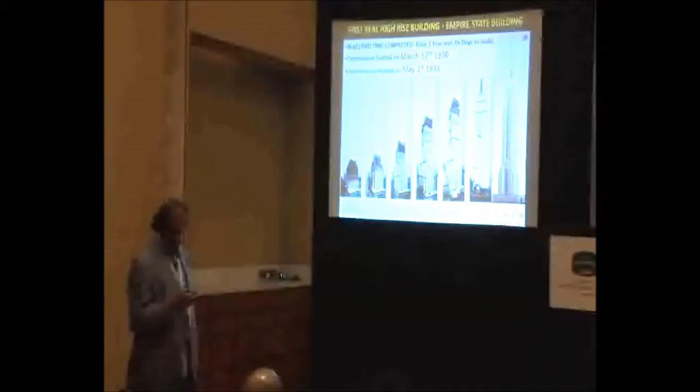It started on March 17th, and by May 1st the building was up, with all the cladding, all the finishing, all the Art Deco interiors done. The building was commissioned by the President from the White House through a remote control. That was the kind of engineering skill and enterprise of that time.

What kind of technology must they have used to make the building so fast, in 13 and a half months? I don't think it required any technology. The only technology I understand that works really well is decision making - there's nothing beyond that. Look at the workforce, the construction.

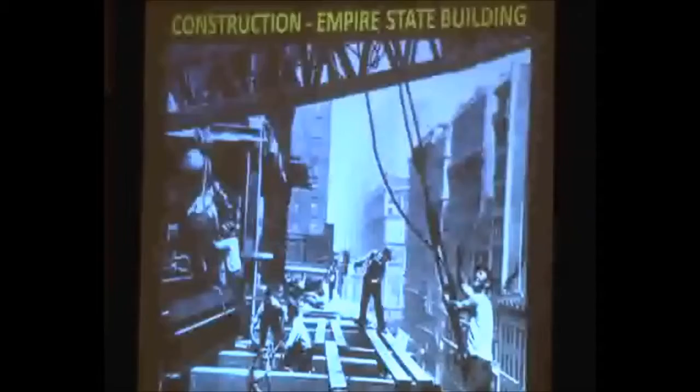These workers didn't even have gloves, helmets, or safety belts. We call them sky boys. They stay in the sky, they rest and work up there, working around the clock purely by the will and desire of the manpower. They were construction workers, immigrants brought from Ontario, not from New York.

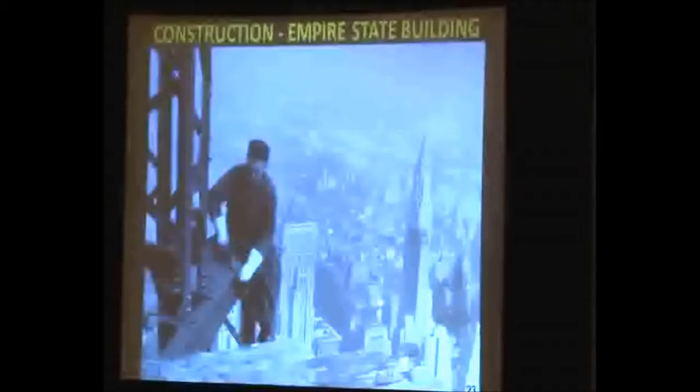This is the 102nd floor, around the 11th month, when they were putting up the spire on top of the building. And they used rivets in those days, not even welding. See the kind of enterprise, the construction technique, cranes, and lifting equipment they must have had - it's simply the will of the manpower.

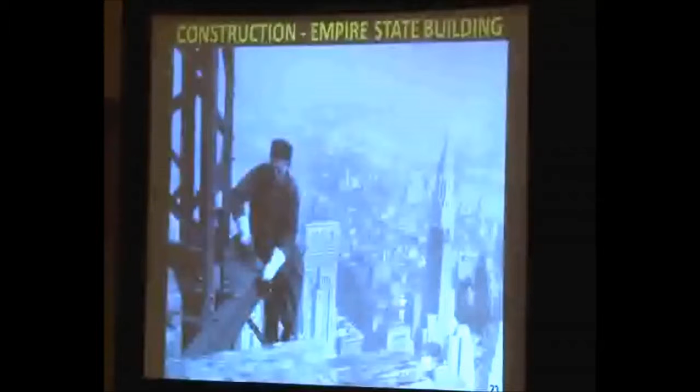This building has been refurbished. It was constructed for about $50 million in 1931, and a refurbishing took around $550 million for this building.

The building was also struck in 1945 by a military plane, by accident. The B-25 plane crashed, and its engine went through the building and fell on the roof of the civilian side, but nothing happened.

The building was designed to take 10 more floors, but they couldn't get permission. The building was so strong, but the only thing is, it was having structural steel of 19 kg per square foot.

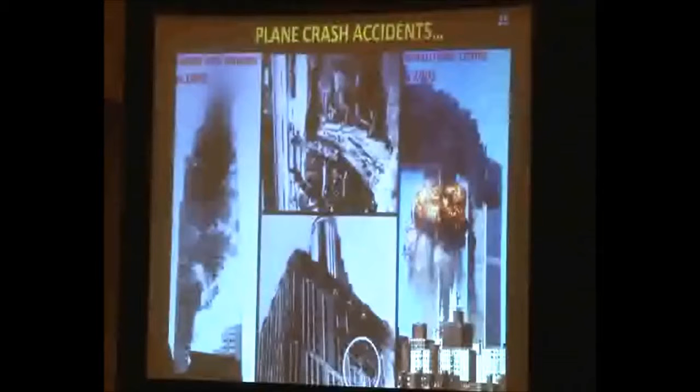The building, as I told you, has been refurbished recently. It spent about $550 million for refurbishing, and spent about $100 million more to retrofit it to make it green. It's the largest building in the world, with 2.5 million square feet area, and got a gold green rating.

It's the largest functioning building in the world with a gold green rating from USGBC, also the US Green Building Council.

The architects and engineers gave a concept at that time called the core and frame structure, which is followed till now in most buildings in the world. They follow this system.

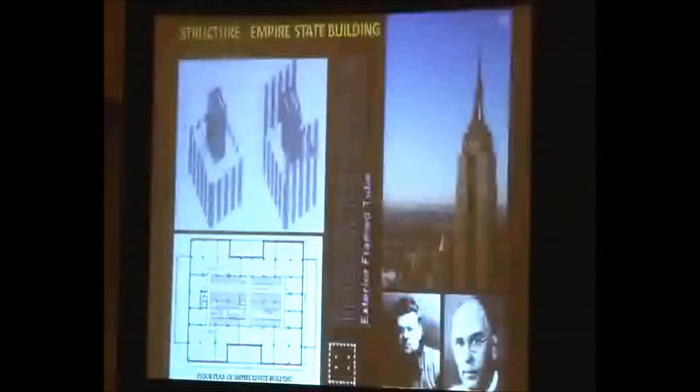Then we had a new structural engineer, Dr. Fazlur Khan. He was a Bangladeshi American resident. He passed through architecture as both architect and engineer. He joined SOM in 1956, and during the 60s he built the most outstanding buildings, 100 to 110 story buildings.

He gave us the concept of structural forms with tubes and frames and so on, which most engineers follow till today. He was known as the Einstein of structural engineers, the greatest structural engineer of the 20th century.

There were a few buildings done by him. We give examples like the Hancock Center, Willis Tower, One Magnificent Mile, and he also devised and gave us, all the engineers, various systems which work and were tried and tested by him.

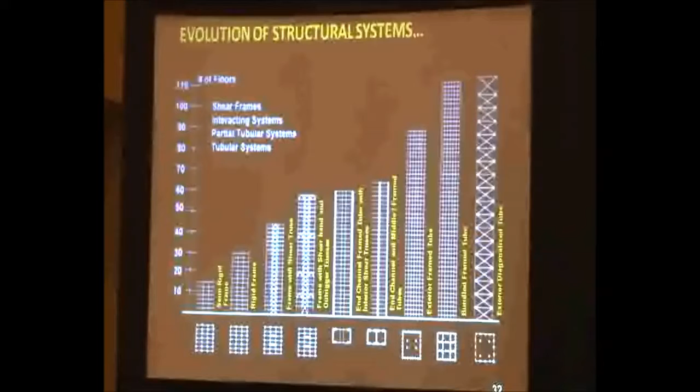We call them rigid frame, tube, diagonal frame, and various kinds of bracings and things like that. The buildings with this kind of building and framing system put together were actually built by him until the 60s.

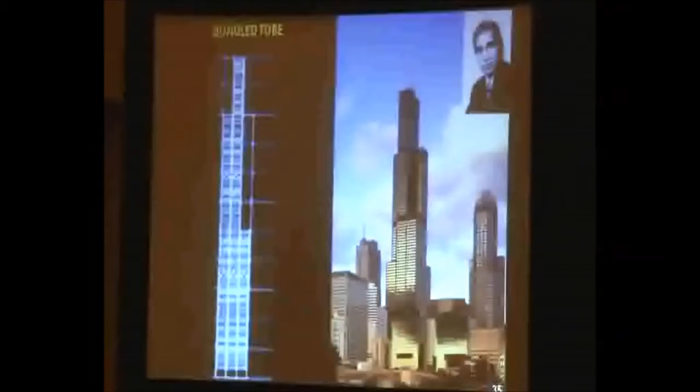Our tube system here, the bundled tube system, is being followed till now in modern times. Burj Khalifa, now the world's tallest tower, and towers in Mumbai behind it use the same concept of bundled tube system for safety, earthquake resistance, and also for wind forces straining over the building.

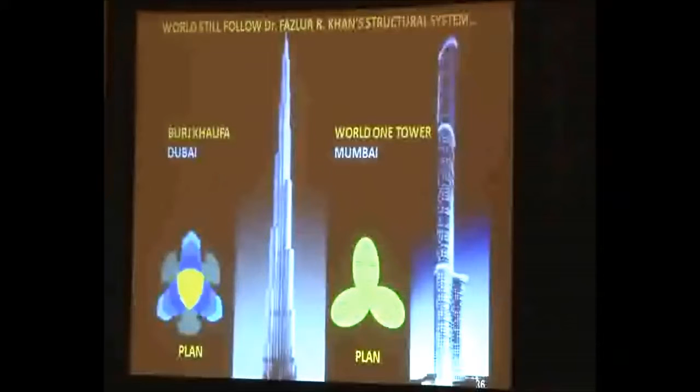And this system works very well. All the buildings all over the world have been following this process.

Do you know that the Burj Khalifa Tower sways by 4 feet due to wind force? The building may move 4 feet, but you won't even notice it, even though 4 feet is quite a large dimension.

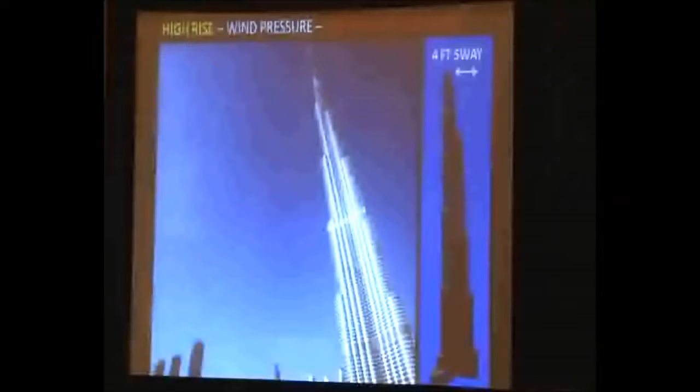It is the architect's design which makes the building safer for earthquake and wind forces. The architect must know engineering, and the engineer must know architecture. A combination of architect and engineer comes out with concepts that make a building more economical, stronger, durable, and resistant to earthquake and wind forces.

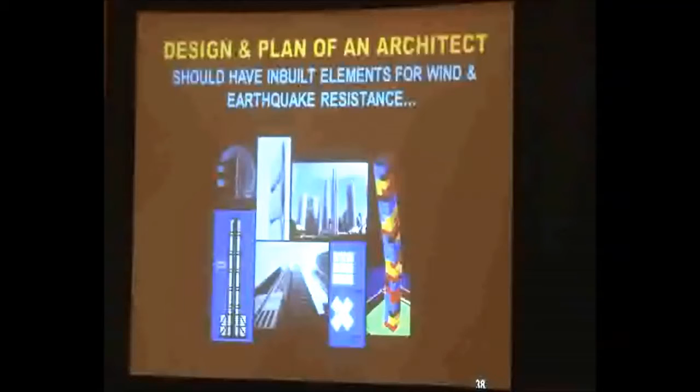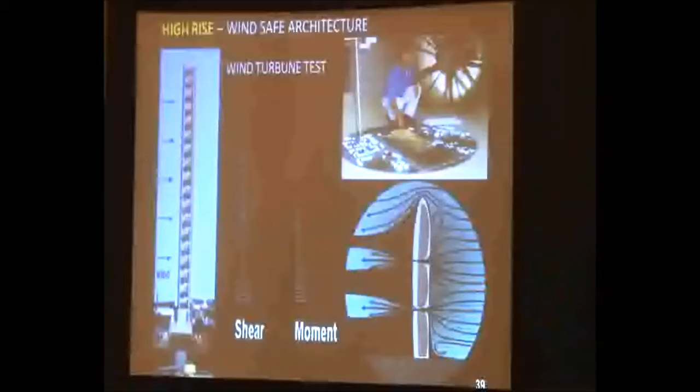Engineers use wind tunnels to make models and check the forces, the shear and moment for the buildings, and architects learn to provide solutions for that.

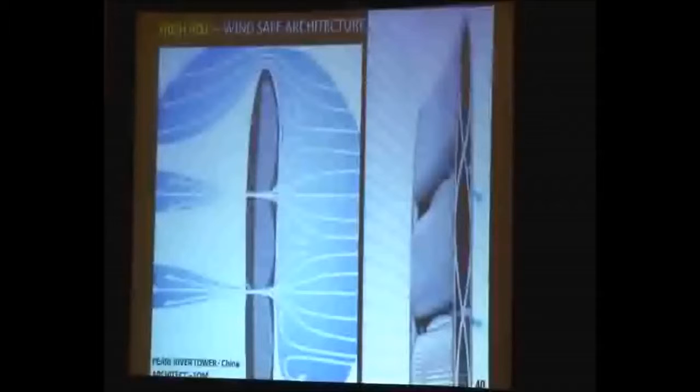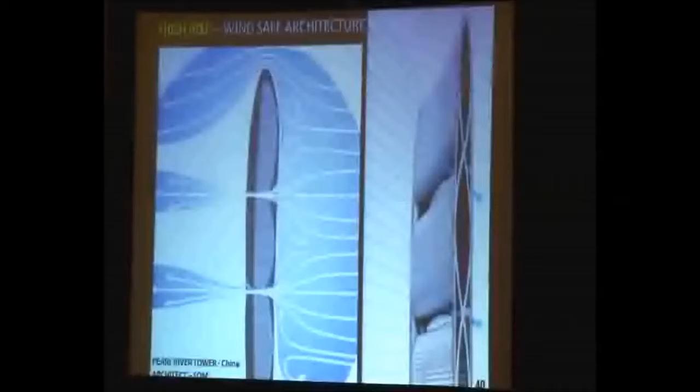In a building done by SOM in China, they gave 4 floors with 2 level cutouts in the building so the wind can flow out and doesn't cause pressure on the building. At the same time, they used that space to put wind turbines to produce power for the building. That's the ingenuity of the architect and engineer put together, making the best out of circumstances. Here's a building done at Pearl River Tower in China.

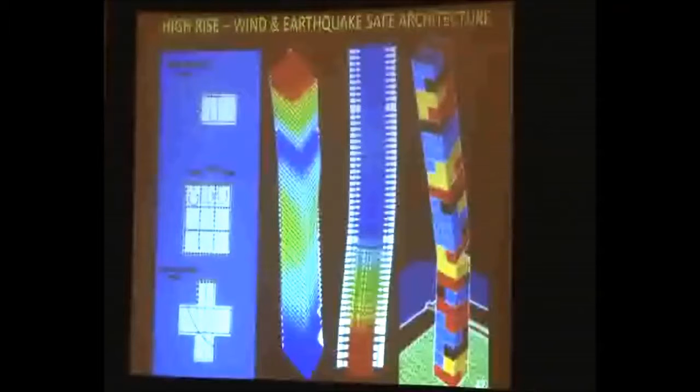In a high-rise building, again, the form can be square, diagonal, or straight depending on the architect. We found that normally a big square mass building looks more stable, but it's not. A diagonal building form actually looks more stable.

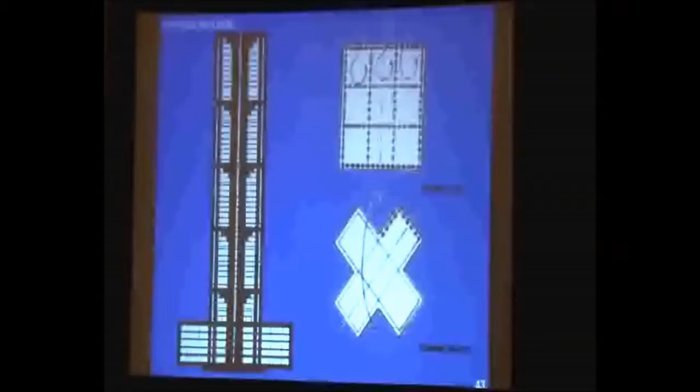It's more stable, lighter, with more mass distributed to take wind pressure and other forces together to make the building more stable. On that principle, you put some bracings or stiffeners in between.

On the same principle, I'm doing a 95-story building in Mumbai, a new corporate building, using composite steel structure—steel and concrete. Steel has a lot of advantages, but its limitations mean it doesn't give me the beautiful architecture or thin slabs required, or ornamentation.

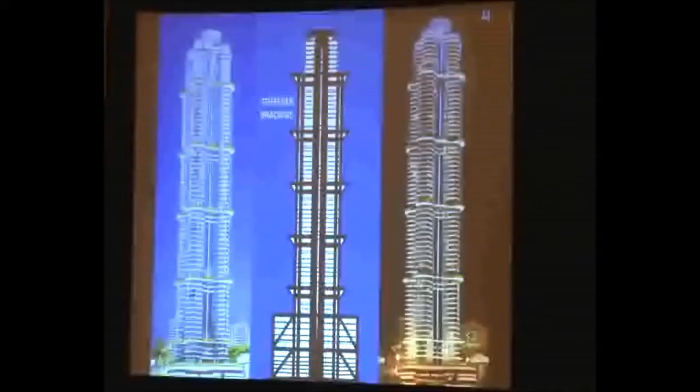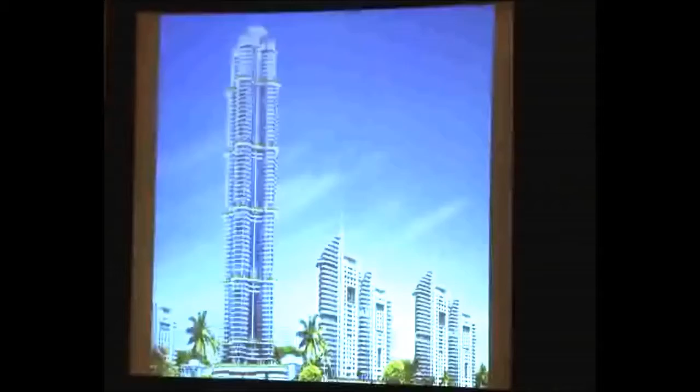So I'm able to combine both of them together, as the skill of an engineer-architect, and we will do it up to a 95 to 100-story building. Beyond that, I have to think differently. These are the building forms coming up now.

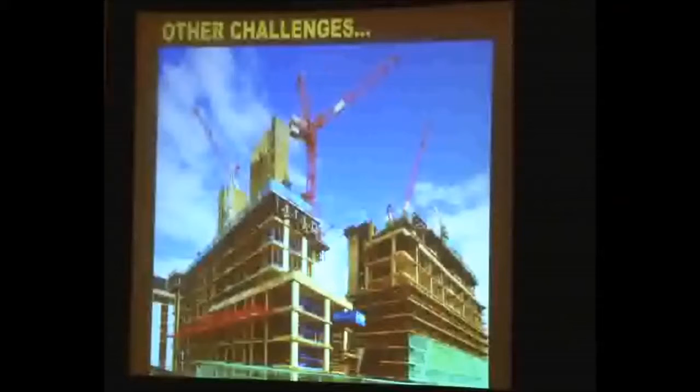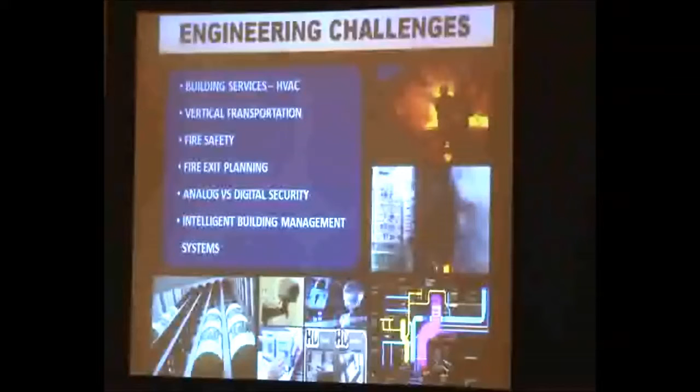Some more buildings coming with the same concrete and steel structure. We have many more challenges in building high-rise buildings. The challenges come in the form of building services, engineering services, fire safety, fire exit planning, and security, intelligent building systems and whatnot in today's modern life. I won't go into detail about these things since different engineers will tackle that. I'm just saying that a building doesn't only come down to the building itself, there are many more things that go into it.

Today we have security systems that were once more like analog systems but have become more like smart grids, at the hand of your phone to manage the entire building system - that's the kind of technology we have. The biggest challenge we have is the building facade, or building elevation as we call it.

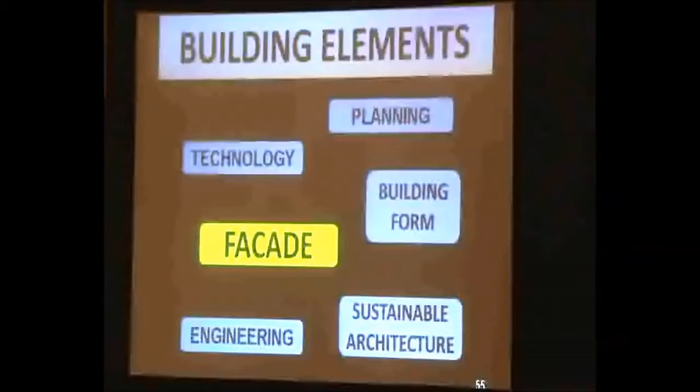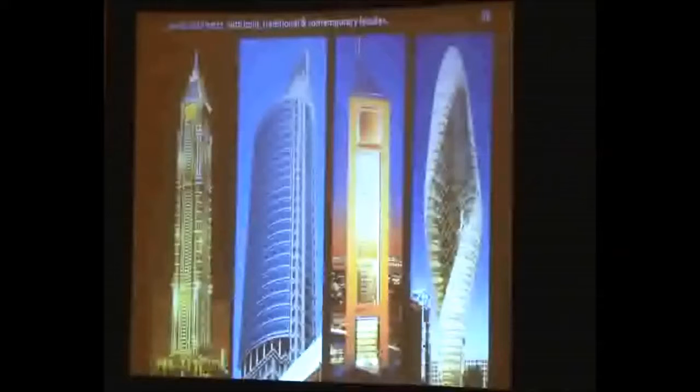We have many different kinds of materials. In old times, building facade was like putting a face to a building, like giving it a cosmetic treatment. Fashion designers do different kinds of dressing for their models - some very traditional, some very contemporary, some bold, some funky and modern. Architects do the same. They make buildings very ornamental, some contemporary, some bold in design, some a little funky. They do a lot of tricks and engineers have to cooperate with them.

We have been doing glazing for many years, in a very traditional manner, with an outer shell having steel structure and steel windows. Our outer glazing was always supposed to have steel structures put on it, which didn't look very great - it looked like a grid, like a mesh. Engineers used structural systems to beautify the building elevation as well. But over the course of time, the old way of doing glazing, where the outer shell was made of supporting members with glass, became too boring.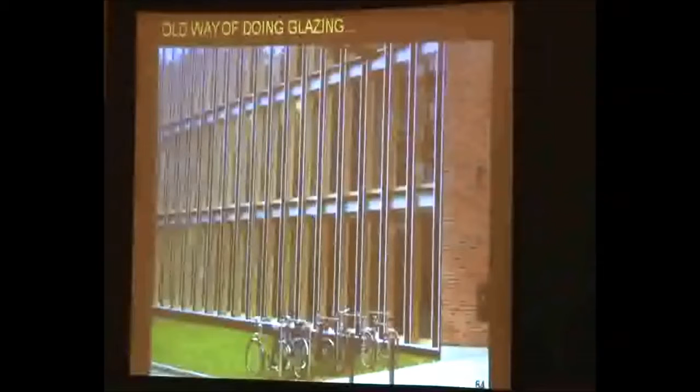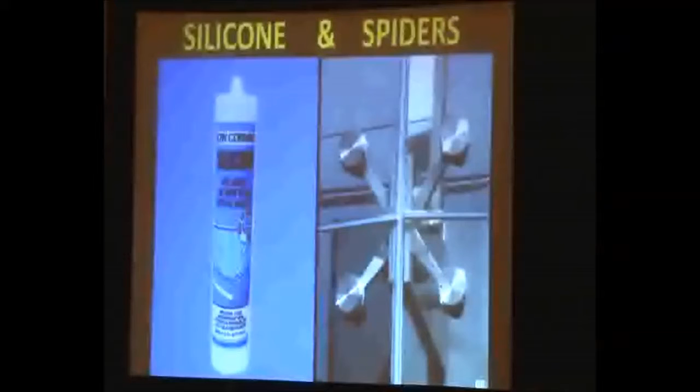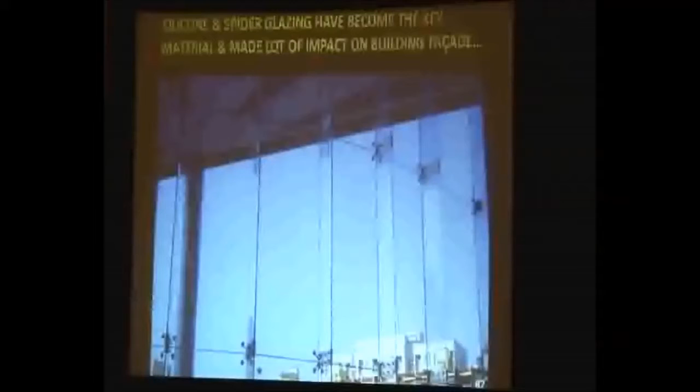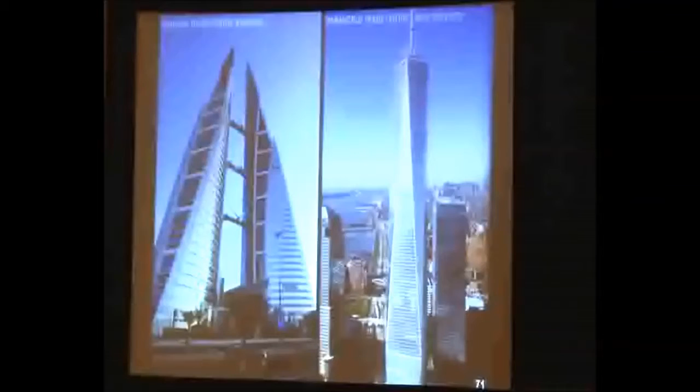In time, the construction industry discovered new materials called green materials, fixing materials called silicones and spiders. Silicone and spiders changed the entire elevation treatment of building facades. We started using glass as a self-supporting material in both tension and compression - a shear glass, cutting away the steel and aluminum. There have been a few facades in the last few decades showing how much we can play around with the system. The entire building facade has been modified in various forms, including the new World Trade Center getting ready now.

A few buildings have executed this kind of facade. It shows how things have changed in the last two decades. Architects always want to be innovative, and they get engineers to work with them. The team of architect and engineers work together to get a different form rather than going with box forms.

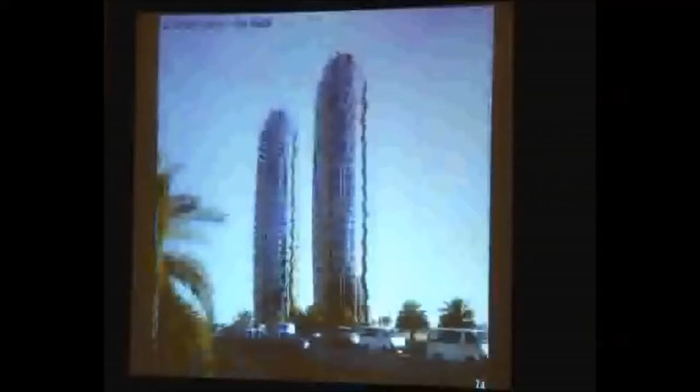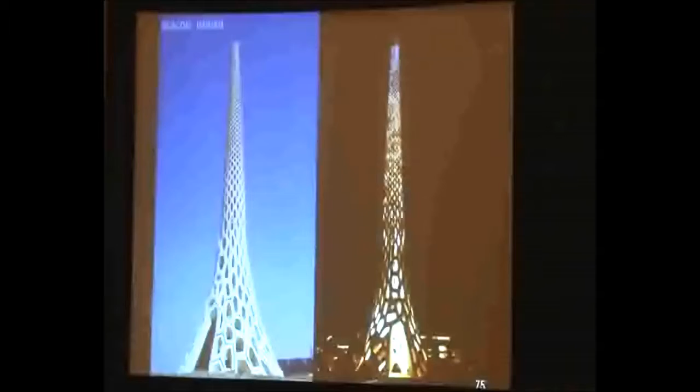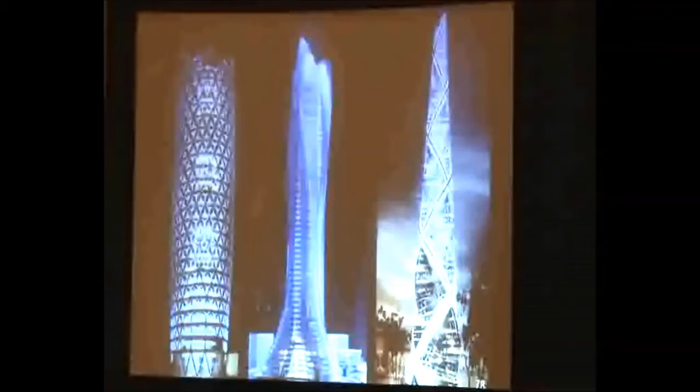There are a few examples of towers - the Bahar Tower in Abu Dhabi, and the Jeddah Beacon Tower coming up. The structural form has played a great role; the architect and engineer together have given form to this. This is the Absolute Tower, which has won awards the world over for the best building in the world in 2012. A few more buildings in the same vein will come up in the future, outside India and a few in India as well.

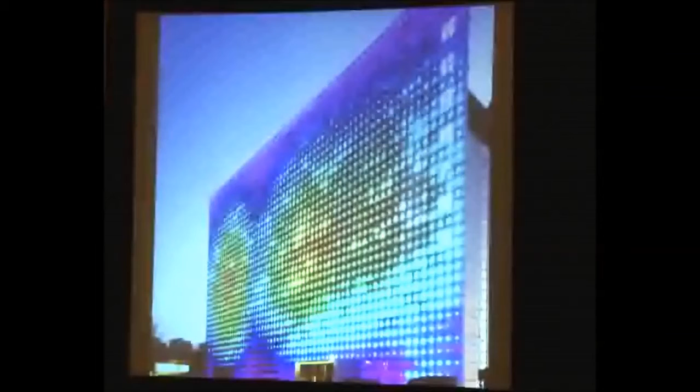We also like to do building illumination. A building should be visible at night, and LED has given us a great advantage in how to do building illumination. We started using building facades also as marketing material for media. So we pick up lighting that is not very heavy, light in weight and light in power consumption, giving various kinds of forms and opportunities for how to illuminate your building and convert it into media for advertising and marketing purposes.

Different companies use this for their own manufacturing headquarters, and we can get different coloring too, like RGB coloring for the same building. One building owner puts in dark colors, a bank puts in a different color scheme for their building. These are the kinds of opportunities available to us going forward.